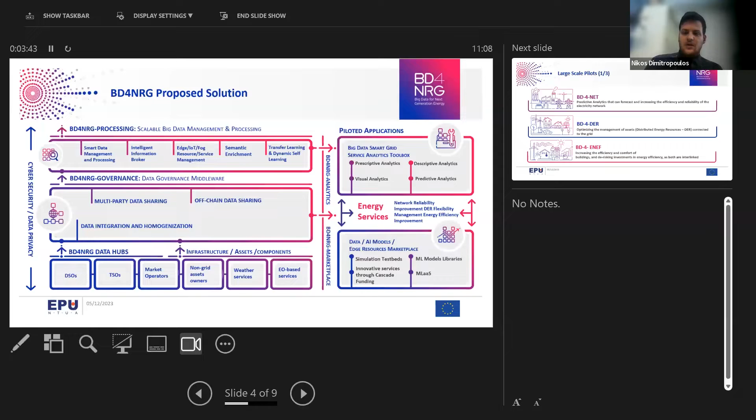So the three pillars of BD4NRG, with our 12 pilots, are BD4NET, which are for predictive analytics that can forecast and increase the efficiency and reliability of the electricity network, BD4DER to optimize the management of assets connected to the grid, and BD4ENEF to increase the efficiency and comfort of buildings and de-risk investments of energy efficiency. Today, we will present and discuss results of two of our pilots of the last pillar, BD4ENEF.

But before that, maybe I can show you, to all of you attending here, the 12 pilots in general, but in a very brief time period. So in BD4Net, you can see here the use cases, the applications we wanted to solve within our project, leveraging on our technological solutions. We have one pilot to integrate off-grid data with condition-based monitoring to enhance predictive asset maintenance.

We have another pilot for cross-function integration of grid operation and predictive asset management. We have a small local DSO for cross-domain functional integration of predictive asset management, and cross-functional predictive asset management for medium voltage grid planning. All these four are under the BD4Net category. These are all TSOs, DSOs. So this pillar tackles this type of energy actors.

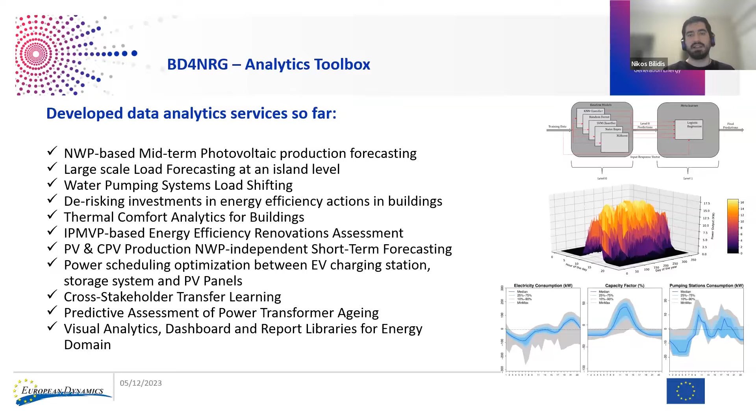IPMVP, International Performance Measurement and Verification Protocol-based energy efficiency renovation assessment, power scheduling optimization between EV charging stations, storage systems, and PV panels, cross-stakeholder transfer learning, predictive assessment of power transformer aging, and as we said, all the visual analytics, the user interfaces, the dashboards, in order to visualize the processed data that come out of all the different analytics tools.

Finally, the marketplace, as I already mentioned, is the place where the users can access the different applications. The main aims were to boost the wider use of the project results by opening new business opportunities in order to enlarge the market share of European data companies and to expand the scope of this BD4NRG project itself and its ecosystem, to integrate and coordinate different services in order to provide the functionality that's required by the end users, to create loosely coupled and collaborating services, and to expose their functionalities through REST APIs.

In the figure, we can see how data that have now been processed come from the various sources which were already mentioned, from the governance layer, from the data catalog and data discovery services, from machine learning tools, the machine learning library and other sources, and they are fed to the services where we have data services, machine learning services, and third-party services.

This proves also the scalable nature of the system, as the project launched its own open call, where we asked external entities to create new services for the BD4NRG framework, and these were easily integrated within the service catalog of the project. Finally, all these are exposed through REST APIs, and we have developed graphical user interfaces that are user-friendly and through which the user can access the different services and applications.

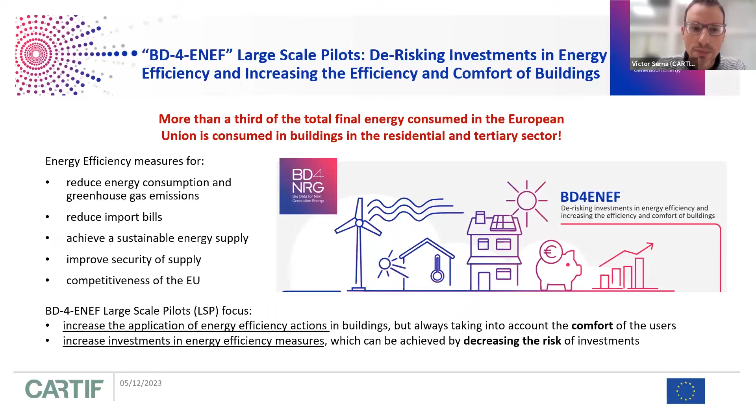So the large-scale pilots in this pillar focus on increasing the application of energy efficiency actions in buildings, always taking into account the comfort of the users, and increasing the investment in energy efficiency measures, which can be achieved by decreasing the risk of the investments. For that, we have three points to cover. One of them is to predict the energy performance of the building by dynamically confronting the EPCs, the energy performance certificates, which are a report that describes how efficient a home is regarding consumption, with the real energy consumption information from monitoring, to provide actionable information.

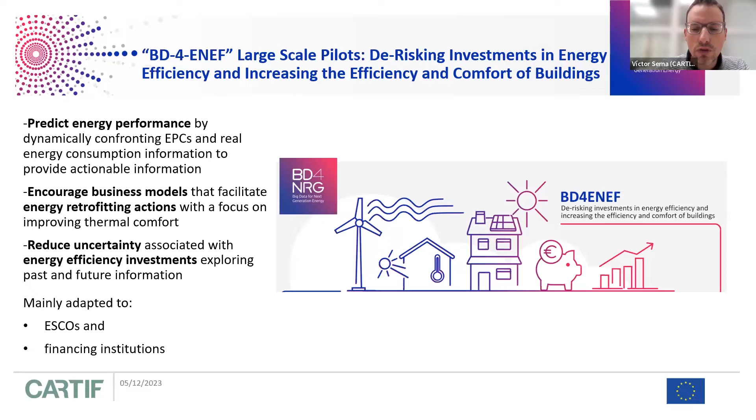Another point is to encourage a business model that facilitates energy retrofitting actions focused on improving the thermal comfort. And the other one is to reduce the uncertainty associated with energy efficiency investments, exploring past and future information. The services developed here are mainly adapted to energy services companies and also financial institutions.

We have three pilots in this pillar. Two of them will be explained later, LSP10 and 11, and for 12 I am giving some notes. LSP10 is predictive and prescriptive analytics for improved energy performance certificates, and the leader is Cartif, and it works very closely with Veolia, and is located in Spain, mainly in the Castilla y León region.

The other pilot in Spain is LSP11, weather-enhanced building thermal comfort prediction to enable reliable energy efficiency forecasting. The leader is Ayuntamiento de Sant Cugat del Vallès, and it works together with Veolia and N2A. And the last pilot is LSP12, predictive analytics for energy efficiency investment de-risking, located in Latvia, and the leader is Leif.

So some notes about every pilot. The LSP10 pilot is related to the energy performance certificate, and the idea is to increase the trust in these reports.

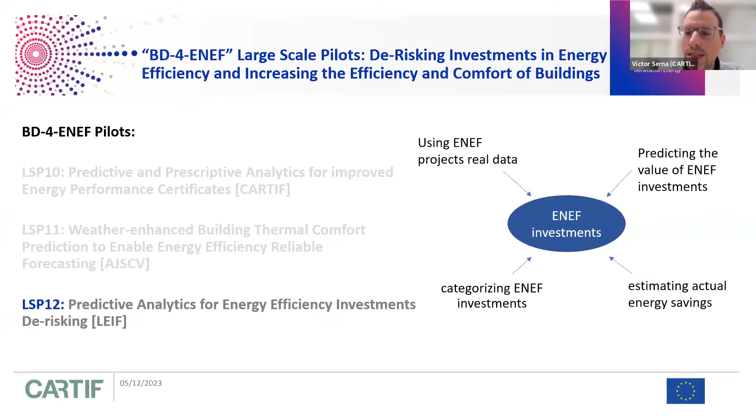The LSP12 is related to energy efficiency investment. For that, we use real data from energy efficiency projects in order to predict the value of energy efficiency investment, categorizing this investment, and estimating the actual energy savings. For this LSP, I'm saying more things about that. The pilot leader is Leif, and is supported by

N2A. The service developed allows to quickly and easily assess key project performance indicators, analyzing and evaluating different methodologies for projects and companies, comparison tools, financial indicators for investors, and so on. And also to explore past and future projects, using the project history, brief description, making projects and companies more attractive to

investors. And last is to conduct a comprehensive risk assessment, incorporating key indicators such as the debt service coverage ratio, complying with legal requirements in environmental legislation and regulation.

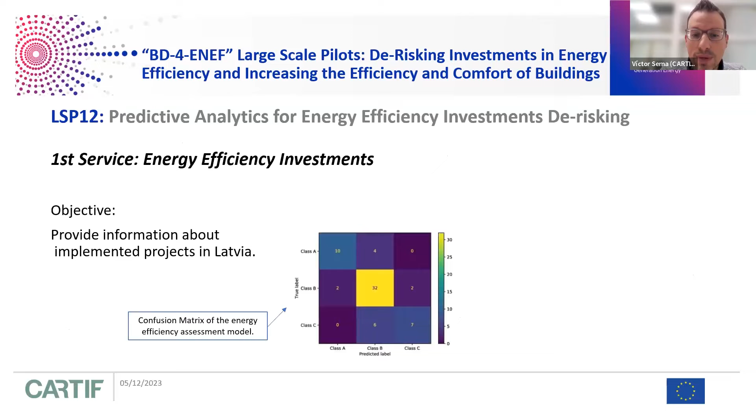other large-scale pilots. So maybe right now it's Pablo Marcos's turn to present the other one. So yes. Good day. Thank you, Victor, for your presentation. I'm going to share my screen. Okay, do you see the screen, right? Yes, not in full right now. Yeah.

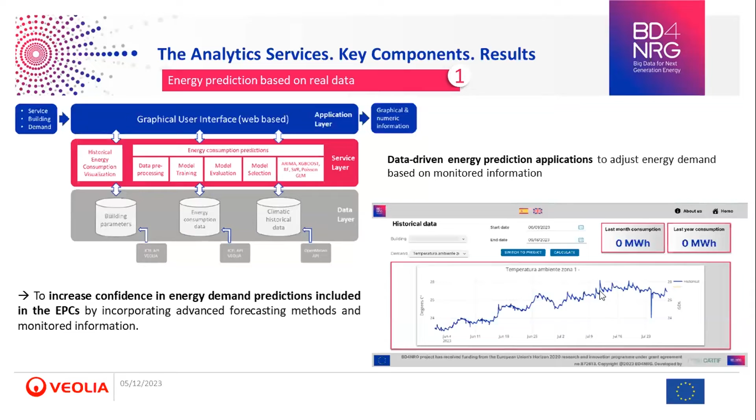Okay. On the second one, the energy performance calculation, but based on public data at urban level. The city level energy performance calculation utilizes public data to estimate certain parameters included in EPCs, such as heating and cooling demand, consumption, more specifically non-renewable primary energy, for instance, and CO2 emissions. This estimation is based on data obtained from public sources, enabling the calculation of EPC values for buildings in a

specific location. And to achieve this, various types of information about the building are required to characterize it and estimate the different parameters found on the EPCs. This includes data from land registries and public EPCs. Multiple machine learning algorithms are employed and tested for these calculations.

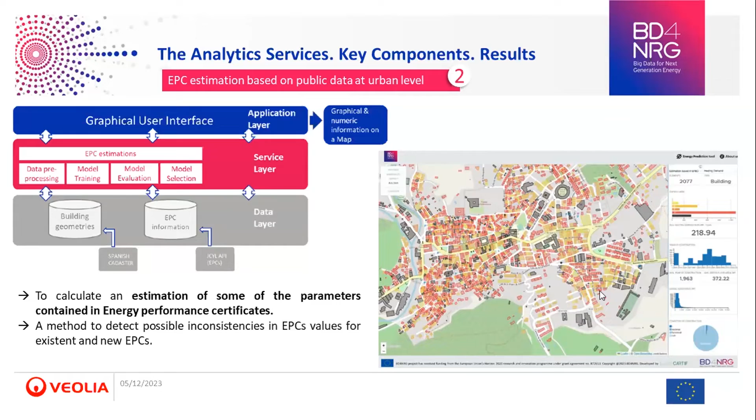And the third one, energy prediction, but considering climate change impacts, is based on analyzing the effects of these changes on energy demand and consumption, particularly in relation to variations from the baseline and their influence on heating and cooling degree hours. So by considering how the temperature will change in the future, the service examines its impact on heating and cooling needs, while also accounting for the effects of solar radiation on building thermal gains.

This service provides an estimation of certain parameters found in the EPCs, energy performance certificates: heating and cooling demand, energy consumption, and CO2 emissions, and it relies on public data sources like Cadaster, LIDAR, or PVGIS. The calculation of energy demand is conducted on an hourly basis and then translated into a daily basis to determine energy consumption and emissions. So this approach enables the estimation of the future EPC values for public buildings in a specific location, taking into account the effects of climate change and its influence on energy demand.

Okay, so how was BD4NRG integrated in the pilot activities? What was the aftermath of that? In summary, the initiative's commitment is demonstrated through the utilization of diverse forecasting techniques and detailed hourly data modeling. And this approach significantly enhanced the dependability of EPCs and established the LSP10 as a trailblazer in technical excellence for energy performance prediction and management.

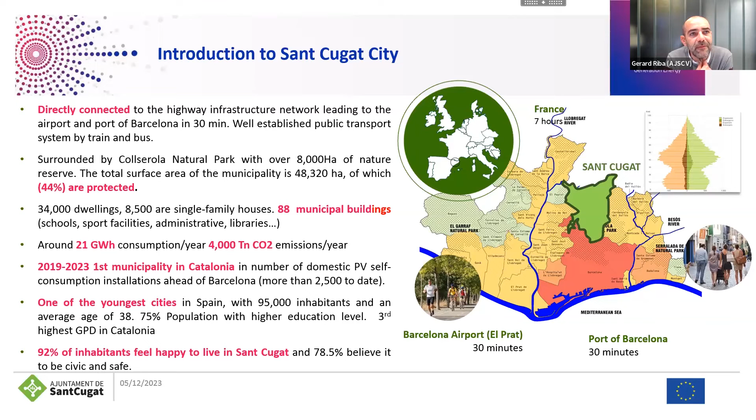It's a young city, with people coming mostly from Barcelona and the rest of Catalonia, and there are big companies. And it's people with high knowledge, or a high level of university studies. So these people are asking us for good solutions and the better solution for the municipality, and as well to reduce our footprint, because we're really aware of climate change.

As Victor said in his presentation, the motivation to do this pilot is to understand that 1/3 of the energy consumption of Europe is coming from buildings. So, as a public administration, we have to find a solution to try to reduce this consumption, not because our impact is really big on all the energy consumption of the city, but to be a pilot to show new technologies that can be developed in the private sector, and we have many buildings, in total 88 municipal buildings. So it is a good place to pilot and test new technologies and to show the market sector to try to develop it.

The primary goal is to find energy retrofitting actions. Those actions are not construction actions. This action is just to change the behavior of the users, and consequently the behavior of the buildings. If we understand that the same building can have a different consumption depending on the user and how they use the energy, we can understand it like a living building.

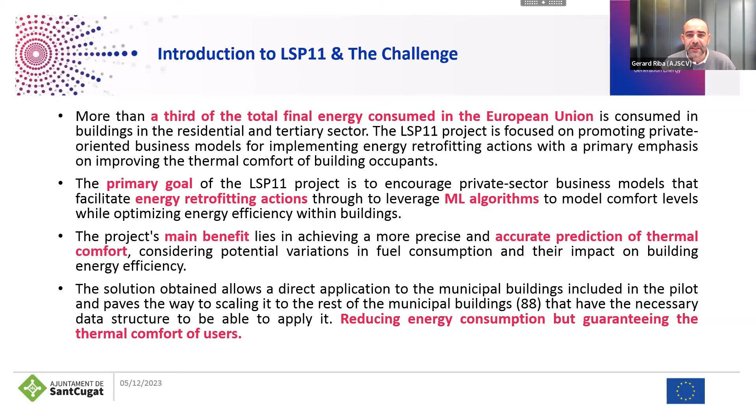Of course, it would be very easy just to switch on the HVAC systems, but with the solution, of course, we have to give comfort to the users while trying to use as little energy as possible. What we have tested in this pilot is 2 buildings. In fact, there was a 3rd building, but in the end we couldn't finish and find real values and conclusions enough to be presented here, because it shows how difficult it is sometimes to get the data, and you have to take into account that each building has different systems to produce the energy.

Sensors in your building and meters to check what's happening and how to control the system. Two buildings tested. The first one is a civic center called the Mira-Sol Civic Center. It's in a neighborhood in Sant Cugat. It's a place where we can do classes, cooking classes, dance classes, and many activities that the neighbors of the city can use. The second one is the Pins del Vallès school.

It's a school with around 400 students, and it has production from a geothermal system, and as well from photovoltaic. It's connected to the grid, so it's not only used for the school. And it has the capacity to store this energy. Not the same in the civic center, which has a big tank to store the energy and as well produces with solar panels.

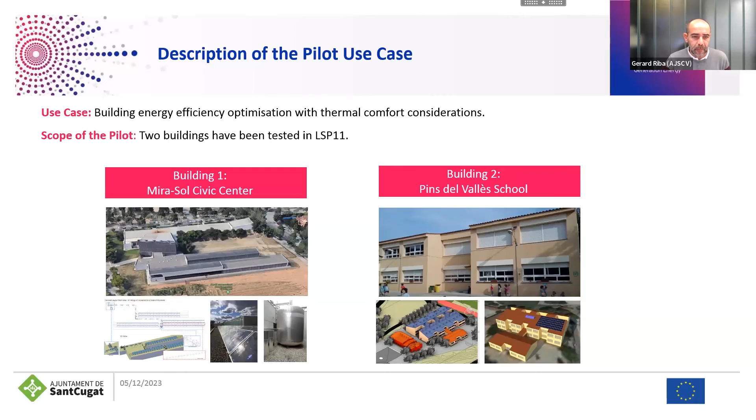The specific actors and stakeholders in the pilot have been the maintenance service company, in this case Veolia, who have the expertise to manage the system. They are the people working every day on the systems and controlling that they're working fine. Data providers give us the information to know better what is happening in the building, to improve in the future and to use that data set to build new machine learning algorithms.

Of course, the Sant Cugat City Council, owner of the buildings, was one of the stakeholders. The BD4NRG partners, to have the knowledge and be trained in these kinds of buildings. And of course, the building users, the people using the building, who were the first affected by the conclusions of the system.

The key components of the infrastructure used to monitor the installation and the building. So it's important to have an advanced building energy management system that will give us the main information of what is happening in the building: the room temperature, whether the windows are open or closed, the temperature, the relative humidity of the rooms.

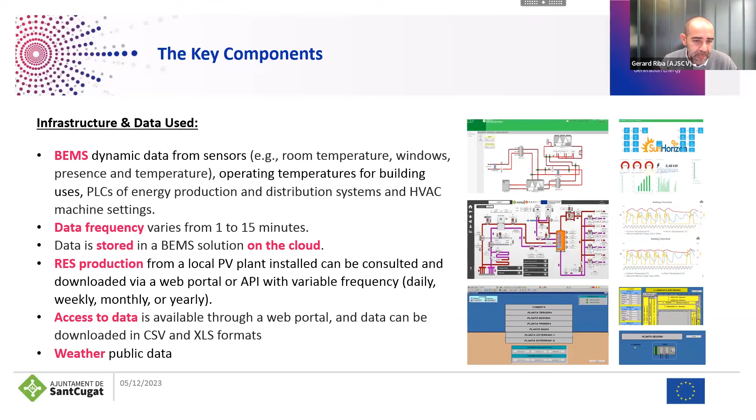The data frequency was from 1 to 15 minutes, and the information was stored in the BEMS, sometimes not in the cloud, but in the servers from the pilot, for example, in the local servers. Another information is the RES production, the production of renewable energy, and how to access this data. And that one was the weather public data.

About the connection and integration with the BD4NRG components, it was the way to have the analysis solutions. First of all, the historical data was sent from CSV files, and this data was pre-processed by the partners and stored in a relational database. As well, it was integrated with the integrated query engine, just to help us to do the queries and give solutions. And of course, to guarantee the security of the use of the data, it was performed through identity and access control management.

The analytic solution provided for the partners of the BD was formed of two models. The first one is the forecasting model that gets all the information, the outdoor temperature, the room temperature, how the HVAC systems of the buildings are working. And from there there are two models to detect the humidity forecast, the temperature forecast, and as well how the HVAC system should be operating.

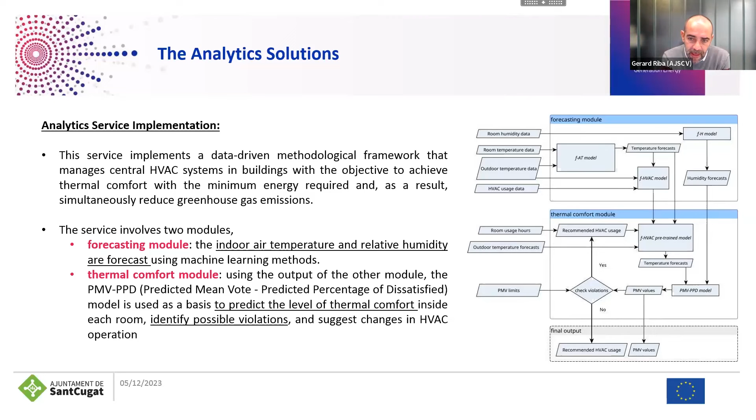The second one was the thermal comfort module. The idea is to give values and how we can change the way to manage the HVAC systems. First of all, to know how the HVAC system should work, how to operate, and as well the comfort values. I mean, how comfortable it is for the users with the ordinary operation of the system and the recommended operating system from this pilot, and as well how many times we are not in the values where we can say there is comfort for the users. So how many violations there are of the comfort state for the users.

Here you can see the service provided. There is a table of schedule for the operation of the HVAC systems, and you can see in the first graph the blue lines are when they should be operating the system, compared with the real one, the ordinary working system now. As well, you can see the number of violations of the values observed.

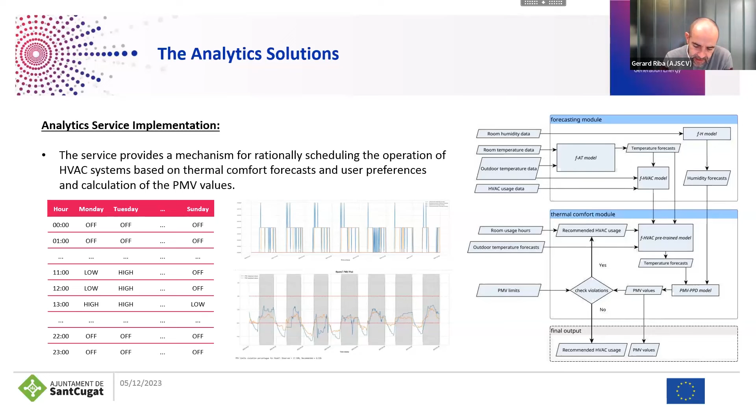If you compare the first building, the Civic Center, in the first row, you can see in the business as usual the number of violations, and the proposal is a little bit higher, in at least 4 of the 10 rooms of the Civic Center. The other 6 are practically the same value, so there is no problem. Only room number 2 was the worst one, because we go from 5.14 violations to 16, so it's a little too big, but there was a reason why we have this violation if you compare, and that's important.

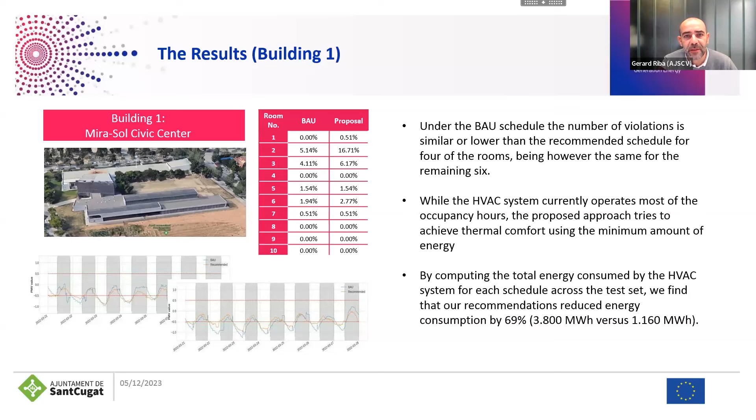One of the main goals of the pilot is to reduce the energy, and with the proposed system we can reduce 69% of the energy consumption of the building. So it's a big goal. It's very promising and encouraging us to try this proposal, this new way to operate HVAC systems, in other buildings. The values are very similar in the second building. The reduction of energy is not so big, but it's 49%, so it's important.

And still more important is that we reduce the number of violations of the comfort values. So we can go from 51% in one of the sides of the building to 28. So it's a great quality. Still too big, we can say, 28, but in the rest you can see it goes from 10 to 0 and from 24 to 0.

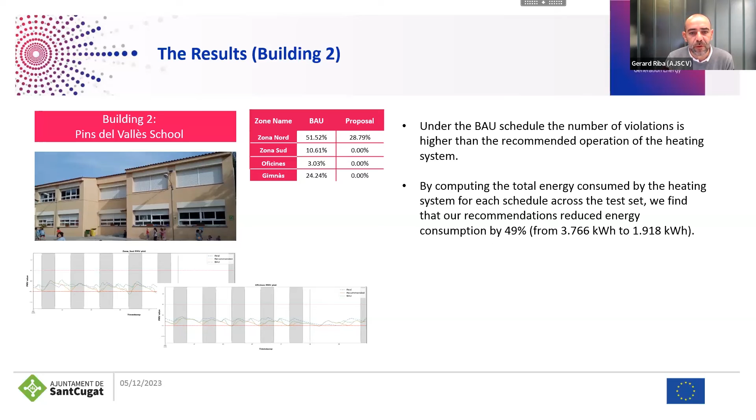The results and the specific KPI used here was the building comfort conditions against the baseline. Before, we came from 1.32 to 22 in the second building, and we reduced to 2.8 and 7.2 with the system. The energy savings were 69 and 49% in each building. And talking about the energy efficiency measure we proposed, there is one, and with it we don't have to do anything, just try to scale this solution, this way to operate, to other buildings.

The number of buildings in the target was 3 because, as I said at the beginning, the city one was cancelled at the end because of the inconsistency of the data, so there is a lack of data.

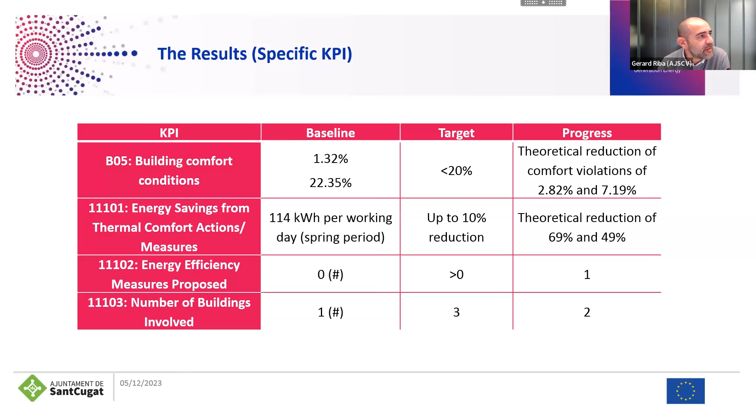The aftermath of the project. And talking about the operational impact, the schedule presented in an analytic solution gives us a one-week operation mode for each of the buildings. So that means every week we have to check that. So it means people have to take care that everything is going as we expected.

It's a technical impact because we cannot replicate this solution if we don't have the sensors, the meters, and a BEMS system to manage and control. So we cannot replicate it in all the buildings. Otherwise, we should have that, and it supposes a cost for the municipality, but when we have it in the building, the system is easily scalable.

As a business impact, I think the most important is to say how the energy consumption can be reduced, and that's the first business impact, but it also gives us the opportunity not only to reduce the energy bill for the municipality. It is also important to show the citizens, to show the market that there are solutions we can implement, with a real return of money for the owners of the buildings, and as well with third companies, to increase the knowledge of how the buildings are working in real time.

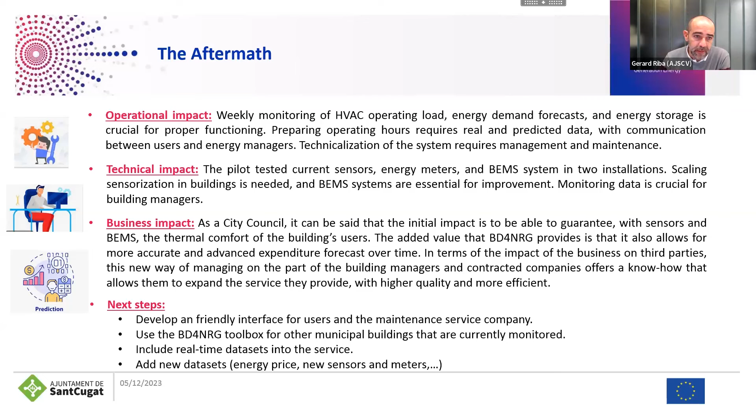It would be very nice to do that. It means that you have different sensors, and you have to equalize the variations and the information you have from each building. And of course, there is a big opportunity to add data sources, meaning the energy price. For example, it could be very interesting if you have the capacity in the building to store energy, to consume when the price is lower, and use the energy storage in the building. So this is all from my side. If you have any questions, of course.

Thanks, Gerard. So with this we now end the presentations of the pilots, and we still have one session with Q&A. So we invite people from the audience to ask a question. You can use the chat to type your question, and please also let us know if you wish any specific speaker to address the question, and we can facilitate this. So, do we have any questions? Okay, I already see a couple.

So, we have one. Can you mention examples of synergies or knowledge sharing opportunities that have arisen during the project? Do we have anyone that would like to answer this question? Maybe Victor, for the general pillar. Yes, for example, there are different functionalities that have been developed for some specific pilots but can be applied in other pilots. One example is the data quality mechanisms developed for the data of a pilot, which can be replicated for other pilots, or specific functionalities, specific analytics.